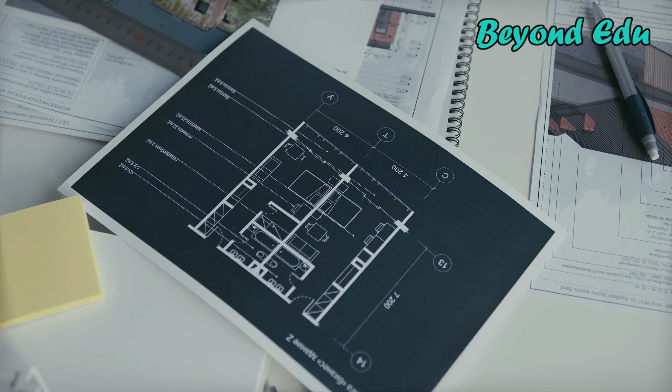Coastal engineers specialize in building coastal structures, like ports, harbors, levees and storm surge barriers, that protect populated areas from flooding and erosion. Environmental engineers specialize in the design and construction of structures and facilities that treat chemical, biological or thermal wastes. There are even geotechnical engineers that analyze the composition of soil to ensure the safety and reliability of building foundations and retaining walls.

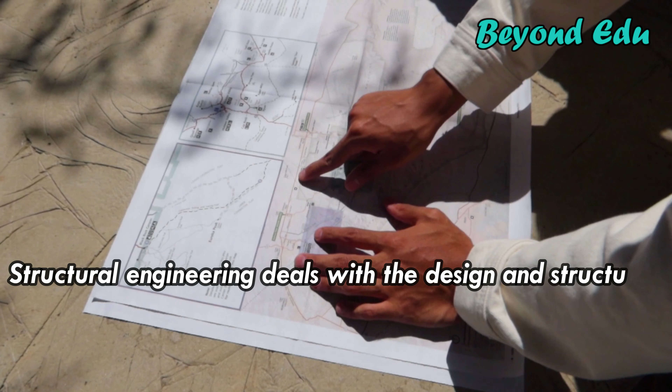In this video, we're focusing in on one particular aspect of civil engineering, structural engineering. Structural engineering deals with the design and structural analysis of buildings, bridges, towers, lighthouses, tunnels, and even offshore structures like oil rigs. Structural engineers may use some creativity to design a structure with visual appeal, but they must also ensure that the structure is safe and stable for its intended use. Keep watching to learn more about structural design in civil engineering.

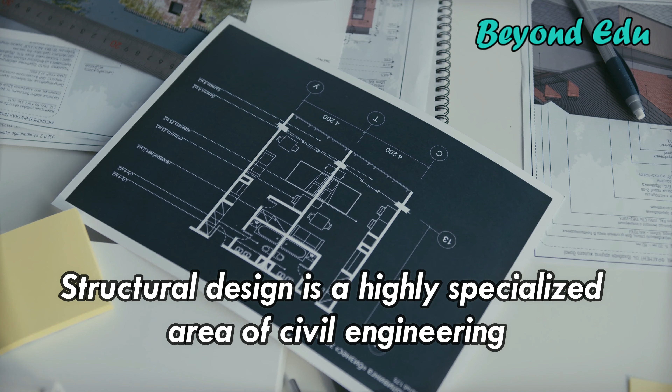Structural design is a highly specialized area of civil engineering. It can be described as a set of methods or tools that are used to determine safe and economical specifications for a structure, and to ensure that a planned structure will be sufficiently strong to carry its intended load. Structural engineers conduct a structural analysis to determine what internal and external forces could affect the structure, then design a structure with the appropriate materials and reinforcements to satisfy the requirements.

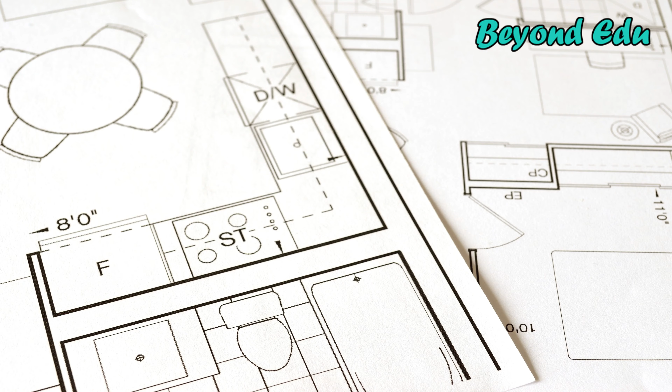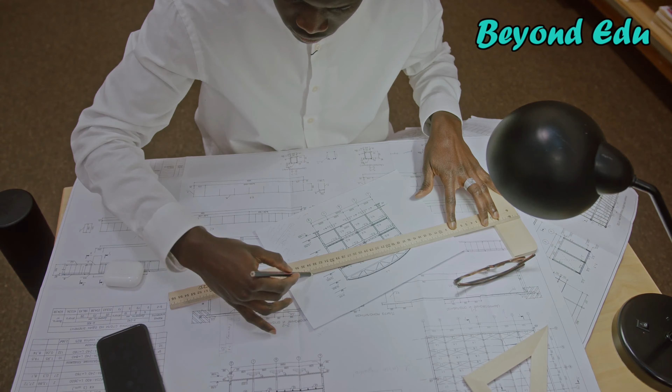There is a strong relationship between the professional disciplines of architecture and structural engineering. While architects are normally tasked with designing the visually appealing features of a project, structural engineers place their focus on strength, durability and safety when designing a building. Structural engineers combine the core principles of structural design with a sound background in physics and materials science to ensure that structures are built to withstand the loads and forces that they will encounter during their usage.

Civil engineers that design structures for construction projects must be excellent problem solvers. The decisions that structural engineers make during the structural design phase of the project will affect everything from the project cost and duration to the ultimate safety and viability of the structure. Below, we highlight some of the most important factors that structural engineers must consider when designing a building.

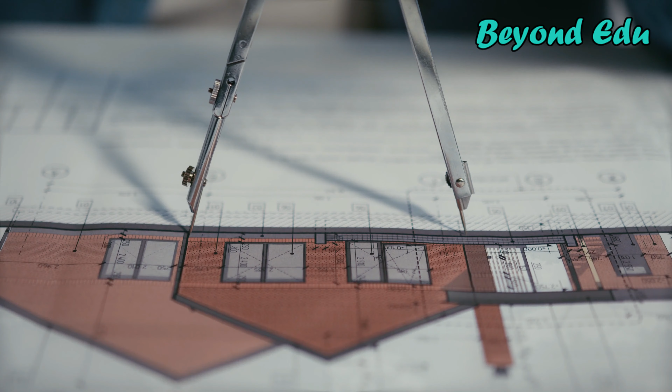Structural engineers are primarily concerned with the safety and stability of structures that they design. Structural analysis is the main tool that structural engineers use to ensure that a structure can withstand the various types of forces that it will encounter during its normal operation.

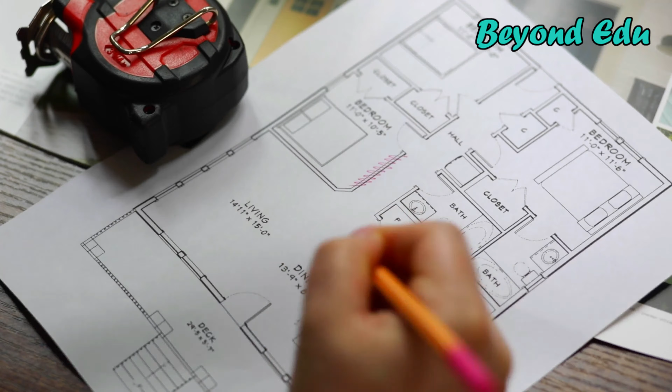A civil engineer designing a subway platform should ensure that the platform will not collapse under the weight of thousands of passengers. A structural engineer designing a railway system should use materials that will not be damaged when a 50,000 pound railway car is used on the tracks. A structural designer must ensure that the train station they are building won't collapse when snow collects on its rooftops in the winter.

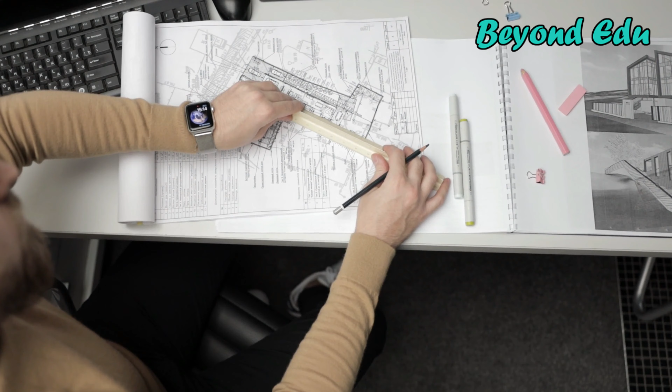Civil engineers investigate three properties of forces when conducting a structural analysis. Magnitude, the size of the force being applied to the structure. Direction, the direction of the force. A strong wind would be acting against the side of the building, while the weight of a heavy snowfall would act downwards, in the direction of gravity. Different systems of materials and reinforcements are required to counteract different types of forces.

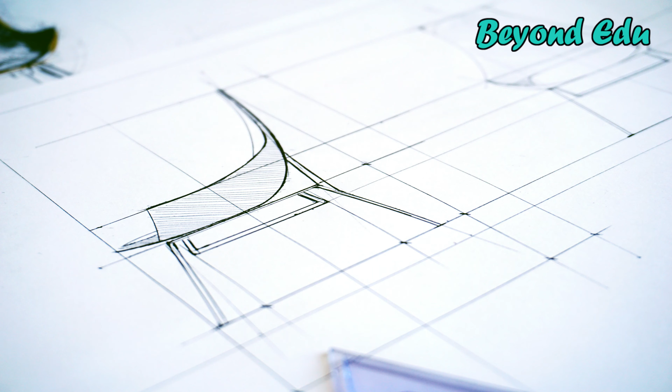Position, the position on which the force acts. Structural engineers must assess the effects of anticipated forces on each area of the building, not just on the building as a whole.

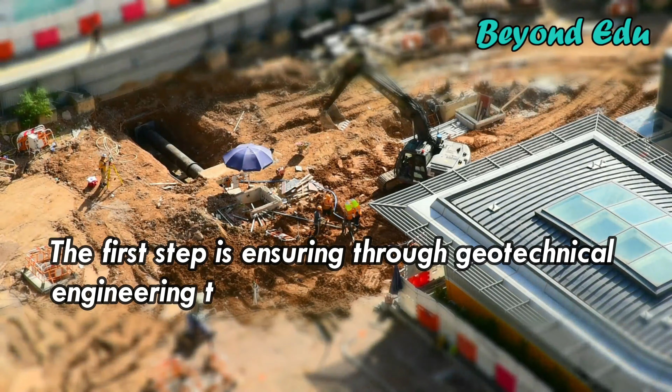If you've ever tried to build a tower out of rocks at the beach, you may have encountered the important structural principle that elements of a structure must remain stationary to ensure their stability. The first step is ensuring through geotechnical engineering that the soil beneath the building provides a solid foundation for construction. A solid foundation helps ensure that the structure itself is immovable, and that it can resist external forces.

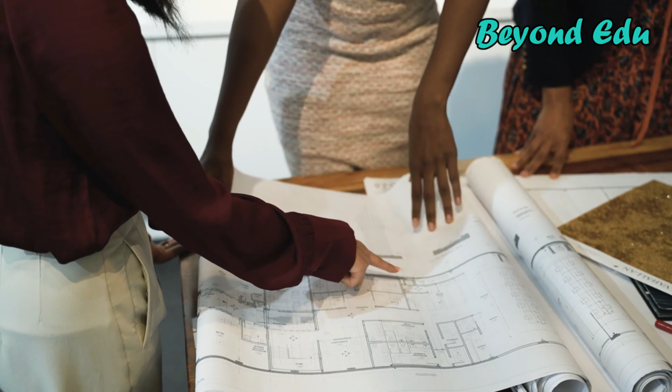For a structure to remain stationary, the sum of forces acting on it must always equal zero. However, civil engineers know that external forces will be applied to the structure throughout its operation. These can include live loads, such as building occupants and furniture, or environmental loads like wind, snow and earthquakes.

In any case, effective structural design requires civil engineers to ensure that a building can absorb applications of external force, maintaining its own equilibrium. Just like a tree branch that doesn't bend will break in the wind, a structure that can't absorb external forces is vulnerable to damage and instability.

The selection of appropriate building materials is one of the key responsibilities of structural design. The ability of a structure to withstand external and internal forces, and maintain its own state of equilibrium and stability, depends on the properties of the materials from which it is constructed. Structural engineers choose materials based on a number of measured properties that predict their performance in construction applications.

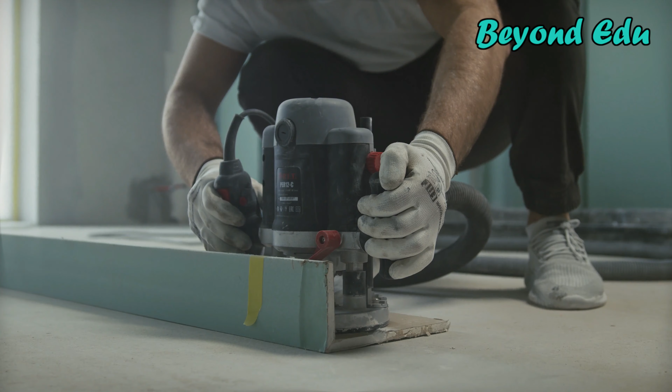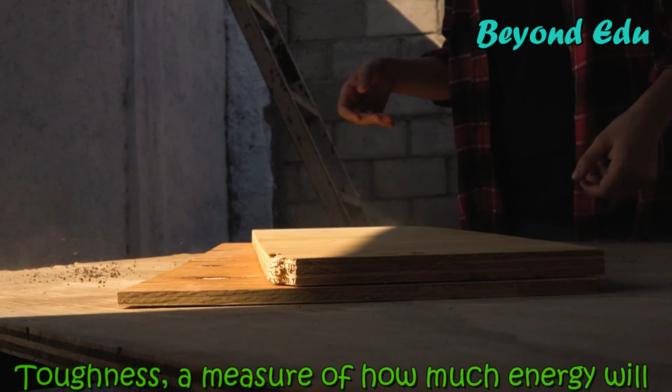Strength, a measure of how well a material can resist an applied stress or load. The opposite of strong is weak. Toughness, a measure of how much energy will cause a given material to crack. The opposite of tough is brittle. Elasticity is a measure of how much a material can be stretched and still return to its shape.

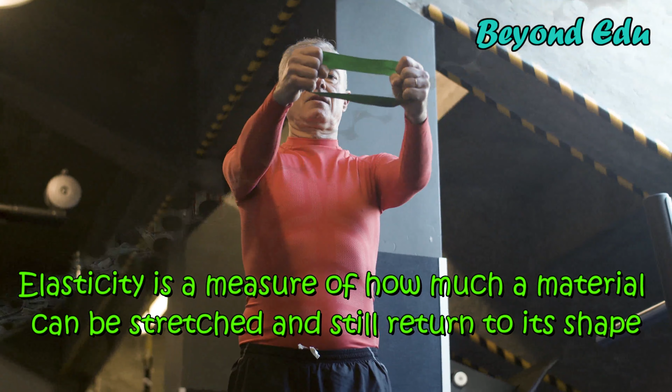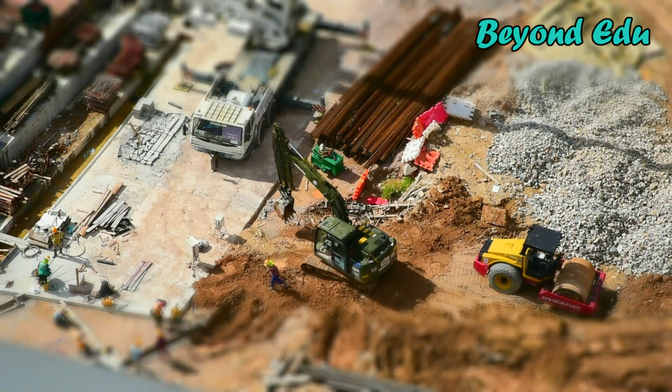Imagine that you're a structural designer creating a design for a skyscraper. How will you decide what building materials to use? Because the building is tall and has a face with a high surface area, you know that the single greatest risk to your structure is likely to be high winds. In addition, because the building is quite tall, it could be at risk of falling over in an earthquake.

If you had a choice between a concrete construction and a steel construction, you'd want to review the properties of both materials and determine how they would affect the safety of your building. When you look up the specifications for a steel construction, you realize that steel is more ductile; it can be plastically elongated by up to 15% before fracturing, whereas concrete exhibits very little plasticity and fractures immediately. Once its threshold for elastic stretch is exceeded, it is quite brittle. You conclude that a material that won't fracture under stress is a better option, and you correctly choose steel as your construction material.

Structural design plays an important role in construction projects. Structural design is conducted by a structural engineer, whose role is to ensure the safety, stability, and performance of the structure. Civil engineers use structural analysis to assess the forces that could act on a structure, and to choose materials and reinforcements that will effectively withstand those forces.

Structural engineers design buildings, towers, tunnels, bridges and other types of structures through the knowledge and successful application of physics principles and material science. In this video we tried to discuss what structural design in civil engineering is, in brief.